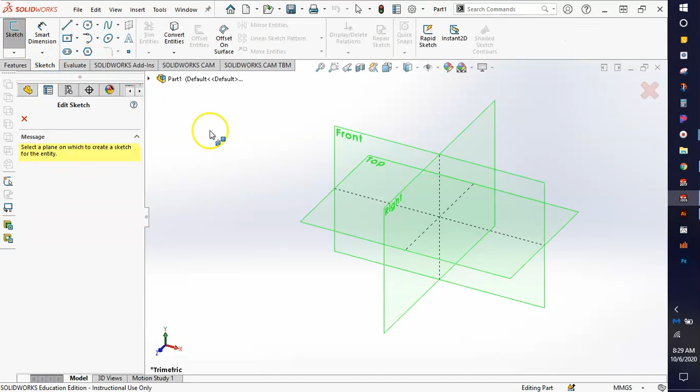And I'm going to be sketching on that front plane. I'm going to start out by just getting the line tool, selecting my origin, and I'm just going to work over to my left. This goes down a little bit, goes on a slight angle.

Then there's a curve, so you could get the curve tool, or if you do this little trick, you just move back over that point and wiggle your mouse a couple times. It turns into a curve. So click, kind of back up and straight up.

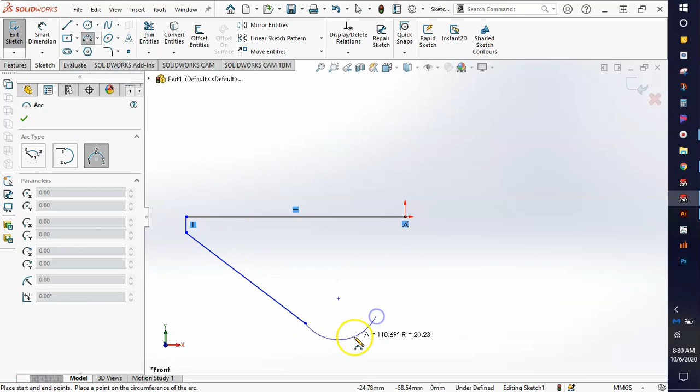Now, if you don't want to do that, you could stop right there. You could just get the 3-point arc, do that, then get your line tool and continue.

Now this is tangent at both of these spots, so please make sure that this is set to tangent.

Okay, and this piece right here is kind of the same thickness all the way across. So you can also see that here.

I know this isn't the clearest, but the height of this line is 12. And if I follow just my mouse straight across, you can see there's another piece that looks similar to this, and that's also 12 back here. That measurement's just turned on its side. So that means this line and this line are going to be equal to one another.

Okay, and then I can just dimension one of them. Dimension this right to 12.

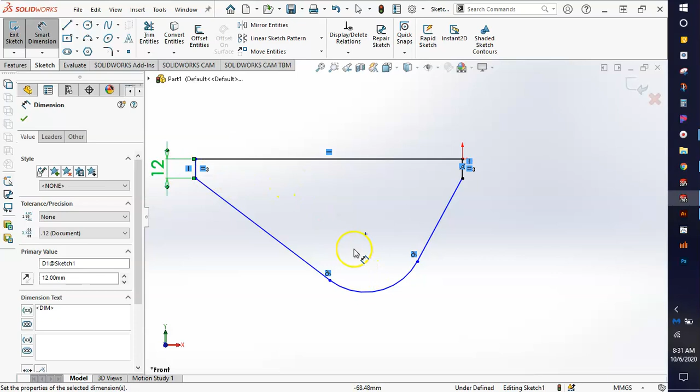It says the distance from the top down to this center point is actually 42. I'm sure you can see that—that's pretty obvious, it's right there in the middle. It's also 42 from this center point into the origin.

Kind of moves that left or right. It says the radius of this curve is 28. So that's pretty much placed.

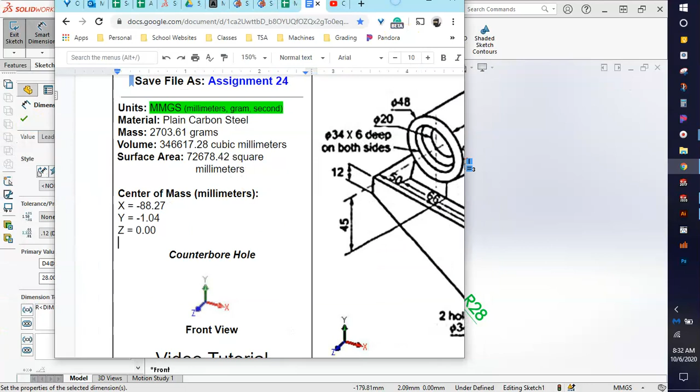Now it just needs the length of this top line. I'm going to pull this picture back over here to explain this again. So if I'm following from this corner where my origin is, it says it's 115 to right here, and that line is actually the center point of this. Okay, and then from there to the end is what we need to figure out.

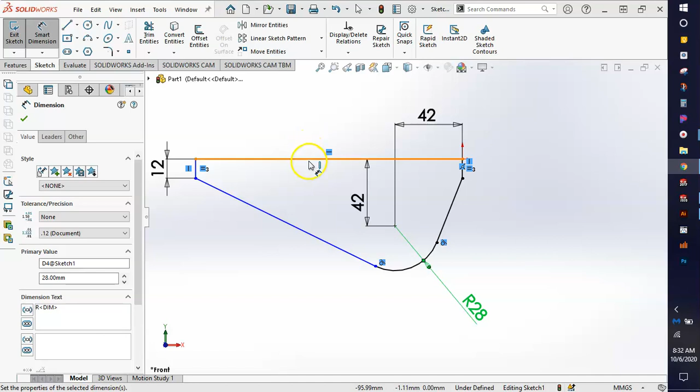Well, this 66 is the base of this piece. So this random 50 that's hanging out over here is actually from the end to this center. So we need 50 plus 115, which is going to be 165, the total length of this. You can even just type in 50 plus 115 to make sure I'm correct, and I am—it's 165.

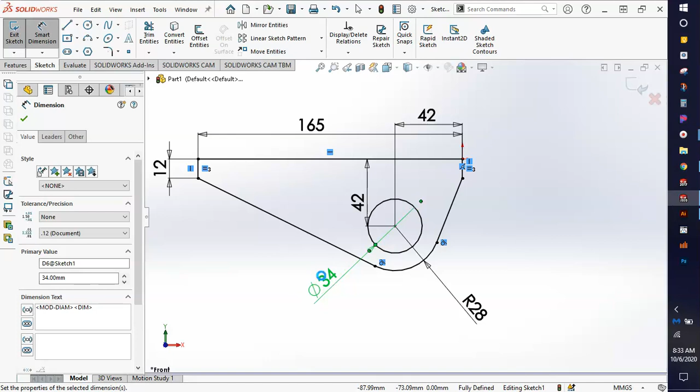Now I'm going to get my circle as well. Put a circle right here on this center point, and I'll make sure that that is diameter of 34. I can go to the Features tab and hit Extrude. And again, we're drawing right in the middle, so change this from blind to mid-plane. And it says the total distance there is 66.

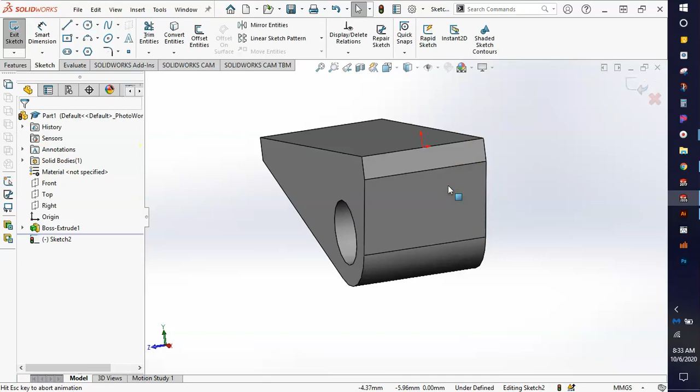Okay, now that bottom is cut out. We made ours solid, so that means we have to sketch and cut this part out. If I rotate around here and sketch on this flat piece and hit Control 8, it'll get me to a nice flat view. I can then use my rectangle tool, click right here on this line and go down to the bottom.

Then we can just dimension this. So it says from the front of it to this line is 12 - you can see on the side picture. And this is also 12, so it's kind of centering up that rectangle we're going to cut out. Make sure it's connected to this line because we already said that's 12 earlier, and it's connected to the bottom.

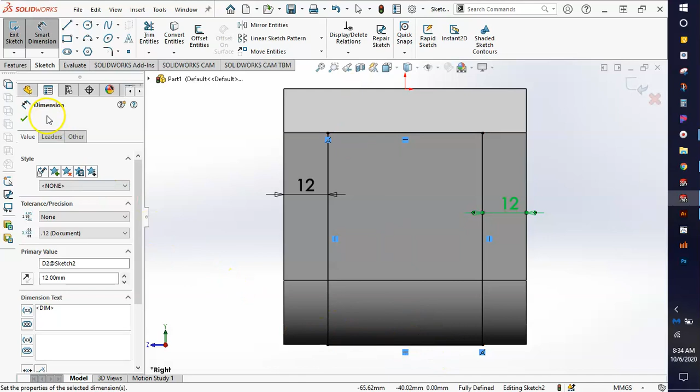Features tab, extrude cut, and we'll set this to through all. Just so you can see what we're doing, since we drew on this flat piece here, we're actually cutting all the way through this entire thing. So now our base is done.

The next part we're going to do is the little slot piece up here. Let's sketch on top there - sketch tool, click on top, hit Control 8. I'm going to do this in two phases: the first is going to just make the ring that goes up, the second is going to cut the piece through. So I'll do the straight slot.

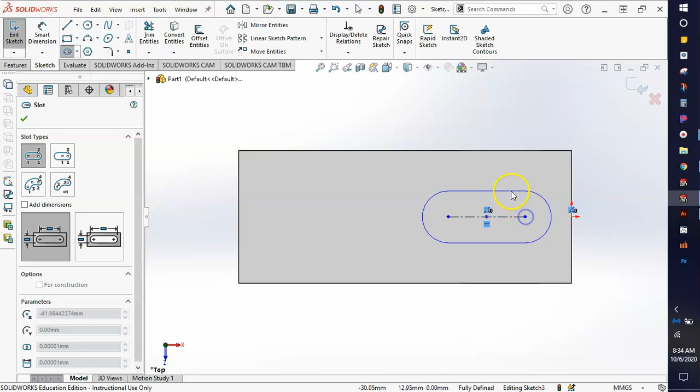Click in here somewhere and draw the center of it. You could do this again to make the outside ring, and I use the same center point so it's locked in there. So now to look at this slot, we see that it says it's 15 in between the inside one.

That's actually the diameter - now from the center to the outside is going to be half of 15, so that's 7.5. But if we just set the 15, we don't have to put the radius of the inside. This radius you see, which is 16, is actually referring to this outside curve. It does look like the line's coming from the center point, because it is - it's saying from this center point out to this curve is a radius of 16. From center point to center point is 36.

It's 42 from the origin into the center of your construction line, and it's 8 tall. Okay, so I'm looking at this grouping of numbers right here.

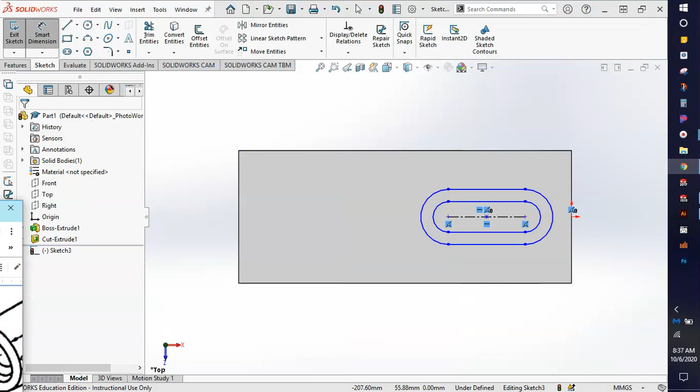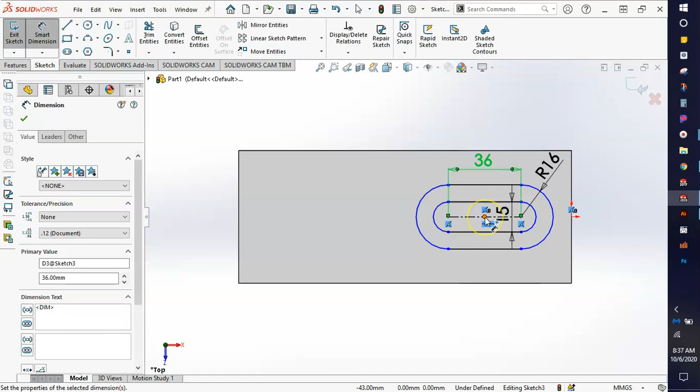So let's go through that again. The inside here from side to side is going to be 15. Outside radius is a radius of 16. The construction line length is 36. And it says from the center, which you see there's a little asterisk or point there, to the origin is 42.

Now if yours is not fully black yet, that's because it's not coincident with the origin. Mine kind of just locked into that - I don't know how I lucked out with that, but if you select this center construction line, see how it says coincident? It is coincident with the origin.

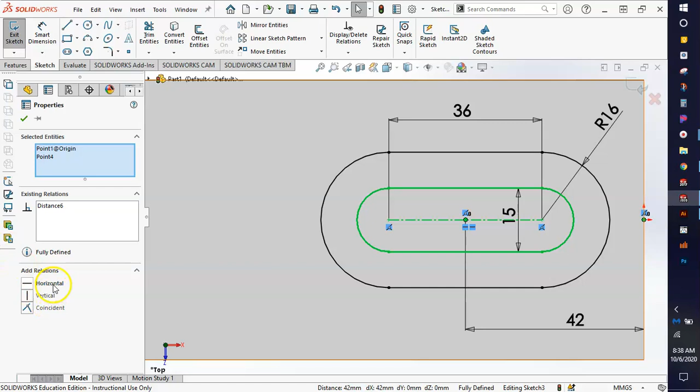So if yours is not coincident with the origin, you can click on this little center point, hold shift, click your origin, and either make them horizontal so they're straight across, or if you did it by clicking on the line, yours is probably going to be coincident with the origin. Same thing, but it should be fully defined.

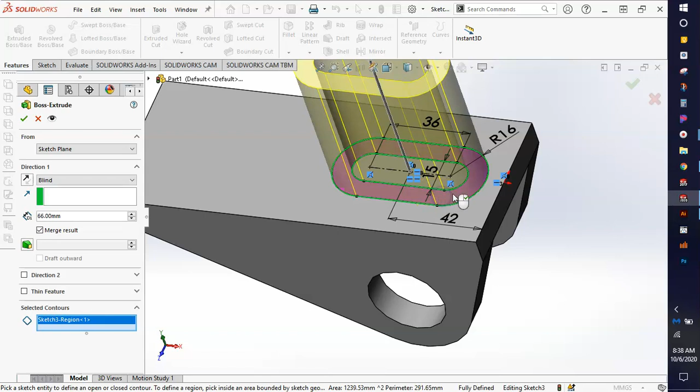Now if I go to the Features tab and hit Extrude, I am going to just have this donut selected. If yours is selected wrong here, hit this drop down and go to Selected Contours - you should be able to pick what you want. If you just click in that region, it should be fine. And that's going to be 8, going up 8.

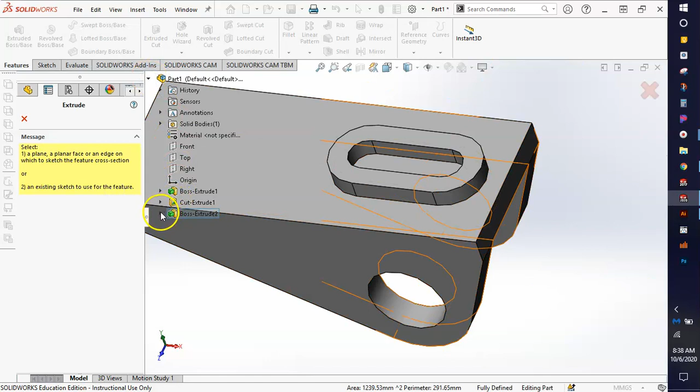Hit the green check. Now that's all good, but we still have this middle piece that's solid, so we need to cut that out again. If I hit my Extrude Cut, it's going to ask me for an existing sketch. I'll hit the drop down, go to my last extrusion here, and there's my sketch. Now the only problem with doing that is it tries to auto select - we don't want that, so again I'll hit this contours button.

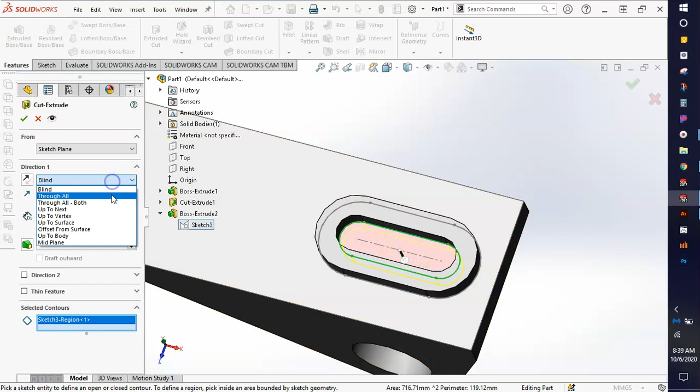See how it says sketch 3? I'm just going to select that and hit delete on my keyboard. Now with this box selected, I can just click in that area, so it's going to take that area out. I'll set this to through all. Green check - so now it cut that piece out. That's how I used both sketches.

Okay, so now is the tricky part back here. This part actually has two things going on. We have this floating tube on top, and it says it's 34 times 6 deep, so 34 in diameter and 6 deep on both sides. What that's saying is it's actually a counterbore hole. That's why you have a whole bunch of different diameters, so you have a counterbore hole on this side and a counterbore hole on this side.

Now that whole entire cylinder is actually suspended in the air. It's suspended up 45 from the base to its center point, and it's got this kind of triangular base to it, two triangular feet.

So we are going to actually have to make an offset plane here. There are other ways of doing this without making a plane, but it's a little bit more than I need to explain, and this whole entire unit is working with planes. So we're going to do this together, and we're going to do an offset plane here first.

But as far as this piece goes, since this is centered, we can sketch right on the front plane and draw this cylinder out and extrude it 55 both ways, then do the counterbore on both sides. After that, we can do these feet.

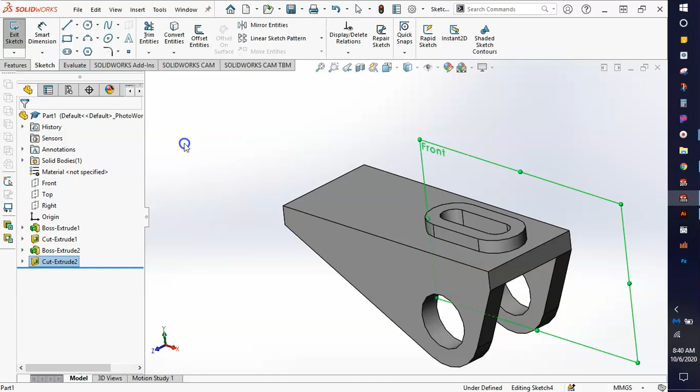Just in case I lost you there, just follow with me. I'm going to hit the sketch tool, and I'm going to click the front plane. So the front plane is going right through the middle of this. I'll hit Control 8, and up here I'm going to draw a circle.

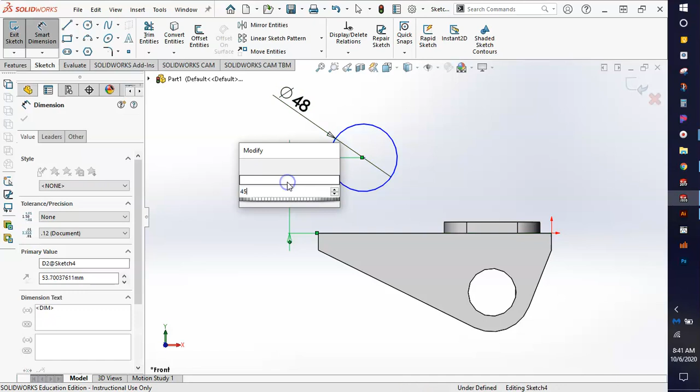That's just going to be my outside circle, so I'm looking for the largest diameter there, which is 48. It says from the line up to its center point is 45, and from the back edge to the center point is 50, which we determined at the very beginning of this when we were figuring out that length. Okay, that's 50. So now I'll go to my Features tab and hit Extrude.

And since this is in the middle, we're going to change this from blind to midplane, and we're going to set it to the total distance of 55.

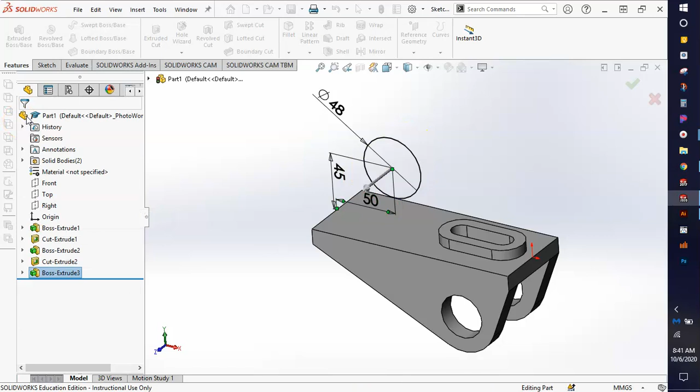Now that we have that cylinder where we need it, we can do the hole wizard, and we want the counterbore hole. Scroll down, we want to set this standard to ANSI metric because we're in metric. The type doesn't matter, the size doesn't matter, the fit doesn't matter. We want the box checked for custom sizing.

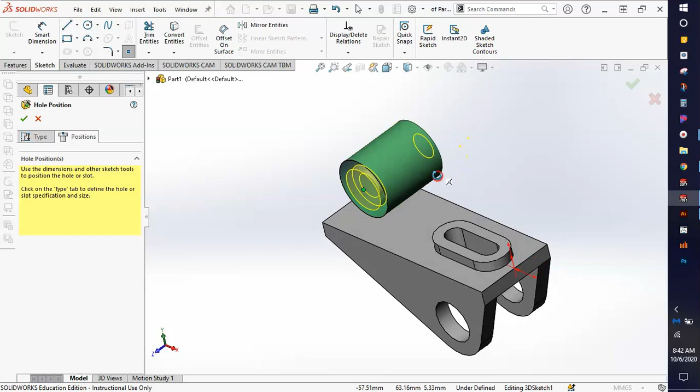And we'll actually hit position, 3D sketch, come right on here. Just click on this surface, rotate around, we'll click on this surface as well. Okay, and we'll hit the green check.

Now we don't necessarily have those lined up. You can see this is just all screwed up, so we need to edit this sketch. I'm going to hit Control 8 so it's on a flat view.

I'll select both of these points, and I'm going to constrain them along the Z. You can see SolidWorks even figured that out. So right now the Y is going up, X is going this way. The Z, which is facing us, so forward and backwards, we're going to align them along the Z. So it'll put them right over top of one another. It's almost like one of them disappeared. That's because in this straight-on view, they're currently on top of one another or in line with one another.

So now I'm going to click off, and I'll select this one. Really, when you're clicking on that one, you're only clicking on this front one, you're not clicking on the back one. So I just have this front one selected. Hold in Shift, and I'm going to click the outside of this cylinder, and make them concentric. And when I move one, you see the other one move too. So now it took those and lined it up so it's on the center point of this actual cylinder.

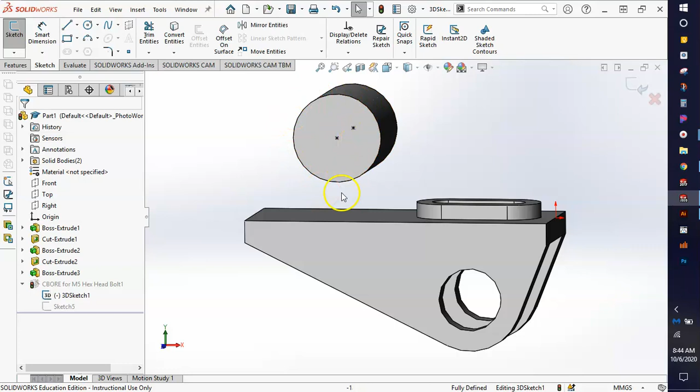Now we can hit the return from sketch, and now we have our counterbore on both sides, and it's perfectly lined up.

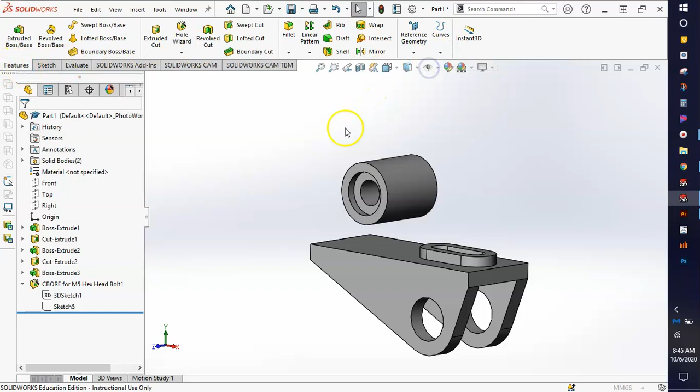Okay, from there, now we are going to have to make an offset plane. So we want to go up to Reference Geometry, so that's going to be on the Features tab, Reference Geometry and Plane. Our first reference is just going to be this outside ring. Okay, and we want to offset this distance a total of 9.

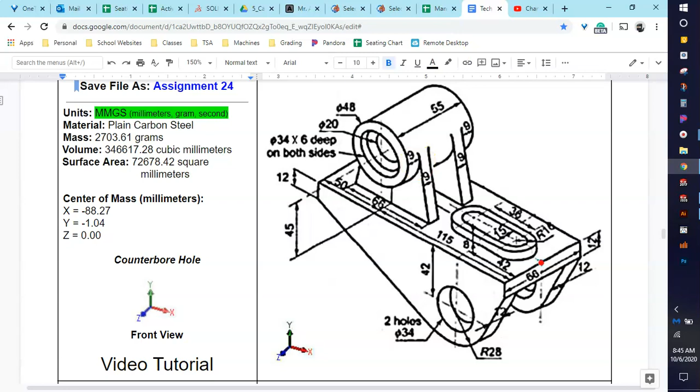And I know that because when I look at this picture, I can see that there's 9 in between this outside and the front face here. So 9 is what we're actually setting this to. So when I type in 9 for the distance, if yours is grayed out, you have to click on that little box and then type in 9.

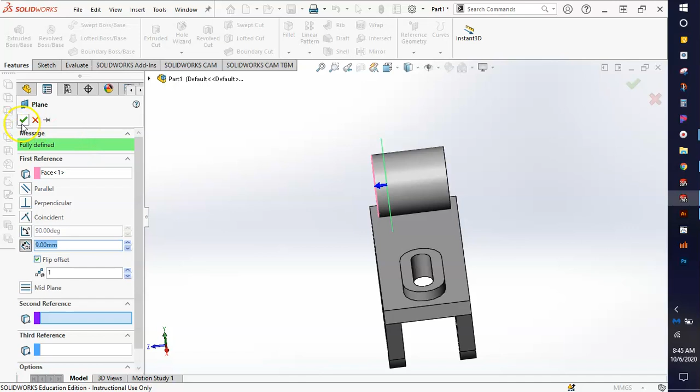You do want to make sure that it's going into the part. Mine right now is going outside of the part. So you might actually have to click the box for flip offset so it moves it in. And you can hit the green check. Okay, so now you are sketching on the inside of that. So with the plane selected, we're going to go to the Sketch tab and select Sketch. I'll hit Control 8.

And then I'm just going to use the line tool. I'm going to move my mouse over this circle, I'm not going to click on those yellow dots. I'm just going to click on the outside of the circle, come down here to the bottom, go straight across. Make sure you don't click on that midpoint. So just click on the line and back up. Again, don't click on the actual orange or yellow dot. You just want to click on the circle.

Okay, so everything is now set except we don't have this bottom line. So if you get the convert entities, we can use that tool just to click that bottom, hit the green check, and we want to trim off the top. So the convert entities just traced that over for us. As you can see, traced that over. So I'm going to get the trim entities and I'll just trim that top piece off.

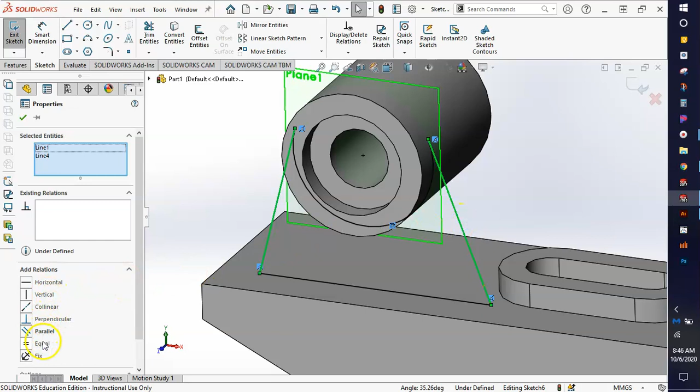Okay. We'll set both of these angled lines. Select both of them. We're going to set them to equal, not parallel, equal. So they're the same. Control 8 to get back. Okay. It says this distance along the bottom is 66. So just dimension that. And that's obviously going to screw these up.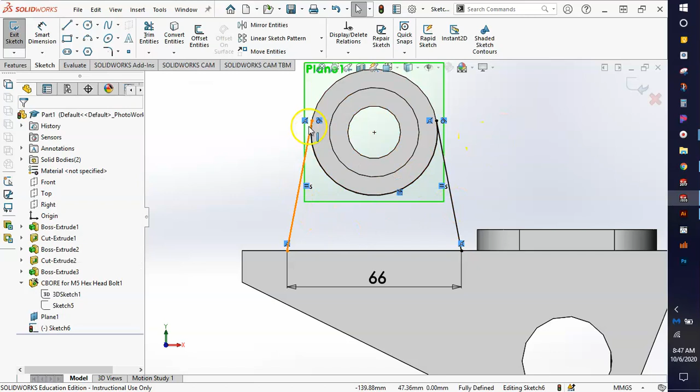So all we need to do now is select this line, hold in Shift, select this curve, and we'll set that to tangent. So it'll move it down to where it needs to be. If we do that same thing to the other side, select those two and set it to tangent, it will fully define that. So these two are equal. They're not locked in. If you're getting some warnings that you can't do that, it's probably because you clicked on that yellow dot, and those yellow dots would be somewhere right around here.

Notice this goes up past the yellow dot because the diameter of this cylinder is actually only 48 and the base of it's 66, meaning you're not coming at a sharp enough angle to make it tangent right at those midpoints. This is actually up past the midpoints a little bit.

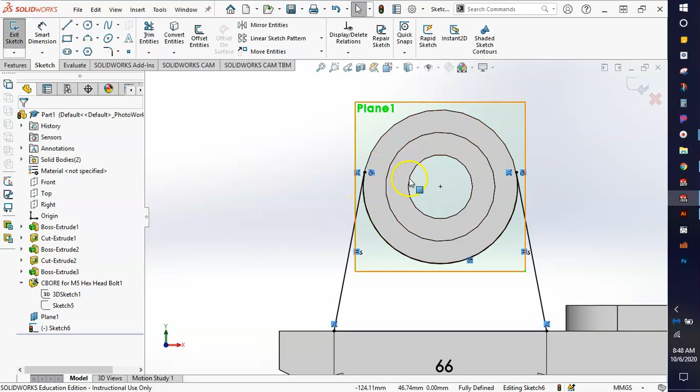Now we'll go to the Features tab and hit Extrude. And we want to make sure we're going back this way. Okay, so hit the reverse button. And that's a total distance of 9. Again, you can see that on the picture. So now that's 1 foot.

You could do that same thing to the other side, but since we are symmetrical and we're working kind of off of the middle plane, you can actually hit the mirror button, and it says mirror faces or plane. You hit that drop down and select the front. That goes right through the middle, and the feature we want is extrusion 4. And you can also click on it here. Hit the green check, and it should mirror that right over.

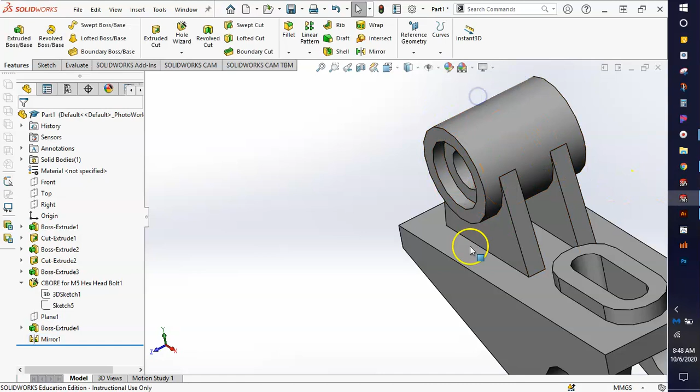If you don't want to see that plane, you can right click and hit the eyeball. But there is our shape. So now we are finished with that. So let's go and change the material. And this is plain carbon steel, which is one of these defaults. Go to the evaluate and mass properties, and you should get a total of

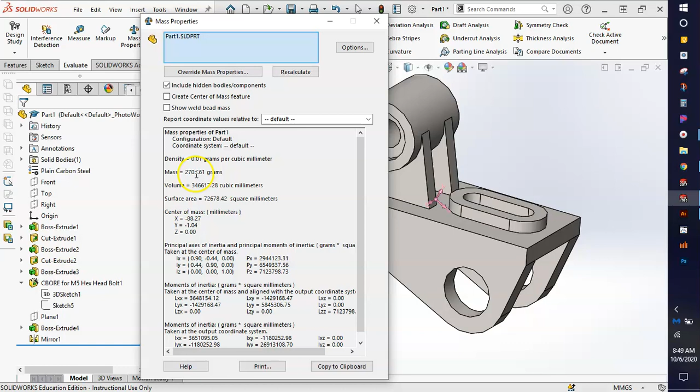2703.61. So 2703.61 grams. Your X should be a negative 88.27, Y should be a negative 1.04, and your Z should be 0 because it is symmetrical. So if you got that, you can save and move on to the next one. If you didn't, please problem solve and figure out where you went wrong.